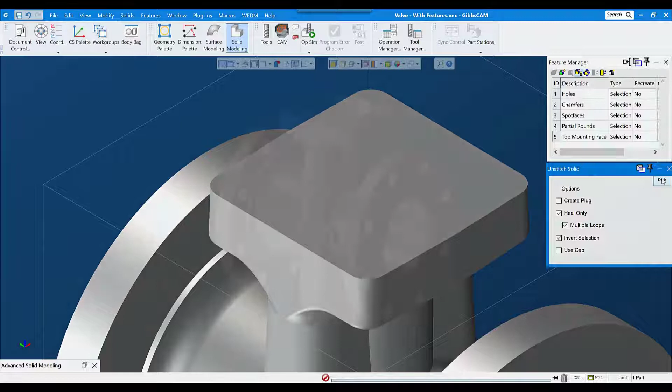This valve body is a fairly straightforward part to program, but we'd probably want a casting model, both for accurate material removal calculations and to make the simulation more realistic. So I will start by placing the model in the body bag by double clicking it. While it's still selected in the body bag, I'll go to the Modify menu and select Duplicate.

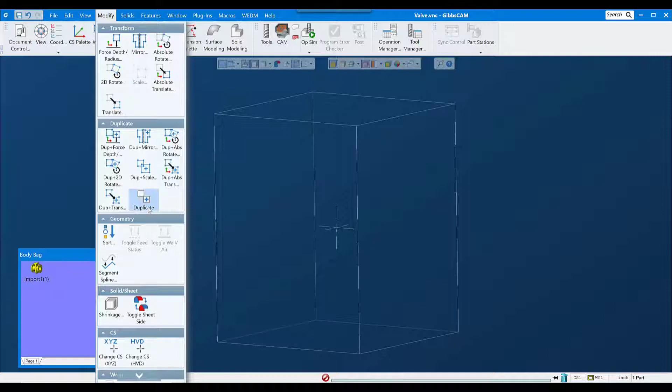The shortcut key for duplicate is Control D, and that gives me a copy of whatever was selected when I duplicated. I'll leave the original model in the body bag and leave it alone, don't want to change it, and I'll modify the copy. Now under Solid Modeling and Advanced Modeling, the fourth button over is Unstitch Solid.

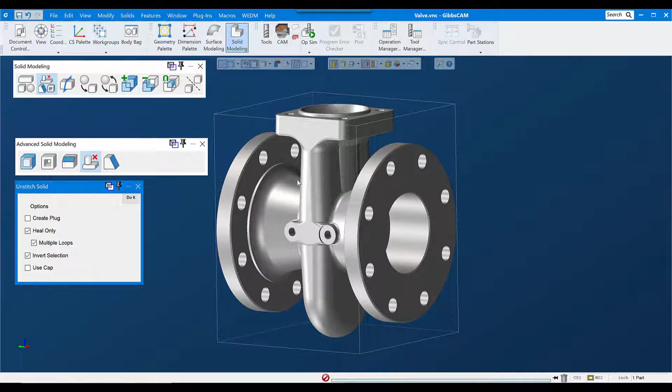Unstitch Solid allows me to remove features from a model. And there's two modes I can use, especially for holes. The first is Edge Selection. If I turn edges on, I can select the top and bottom edge, or really any edges in a single void that break out of the model, that break out into open air, and click Do It.

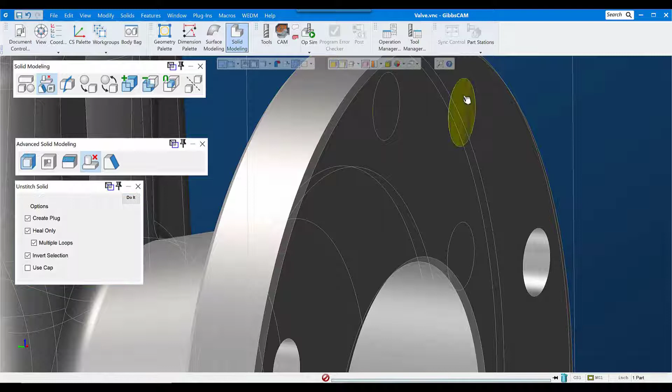Now notice that there is a Create Plug choice here. If I turn that on, there will be a negative of the space that's filled in created, as well as removing that space from the model. So here's a plug that represents the negative of that hole. Typically you would use this for core and cavity or some other situation where you need the negative of that void. Generally speaking, I'm going to leave that off for work like this.

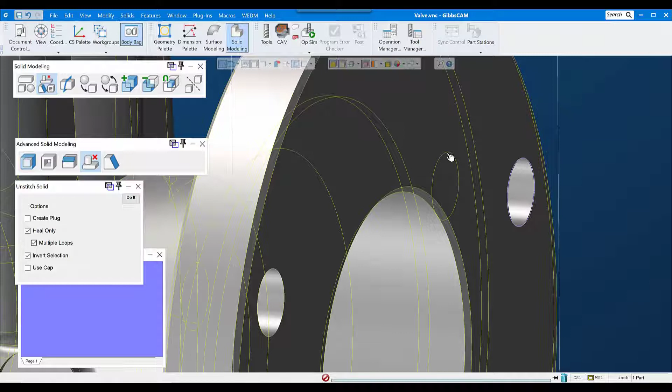The limitation to selecting edges for unstitching is that I can only do one void at a time. If I try to do multiple voids, I get a message saying edges split body into more than two face sets. So I'm limited to one edge set at a time.

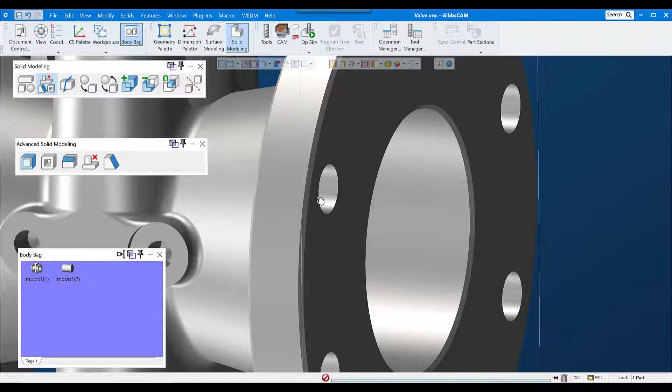Now the other mode that I can use is face selection. Face selection allows me to simply select all the faces that make up that hole, and on simple holes like these, this is probably the fastest, easiest way to do it. I get the same result as with edge selection, with the exception of I can select multiple holes or multiple voids at one time.

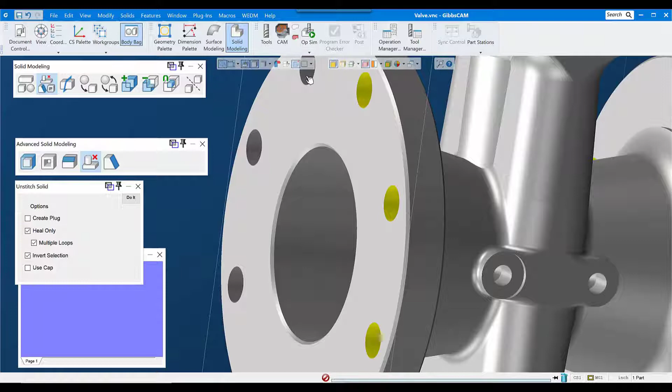But you need to remember that I have to select all of the faces that are part of that hole. So on simple holes like this, it's fairly easy and straightforward, but on more complex holes, it can be time consuming or difficult to get all those faces selected. We'll go ahead and remove these holes up here while we're at it.

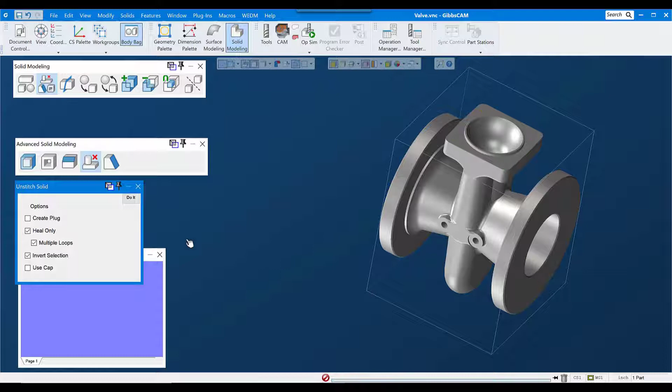Another use that I can put Unstitch Solid to is removing other features such as chamfers and fillets. As long as the software can merge the faces on either side of what you're unstitching, it will successfully unstitch.

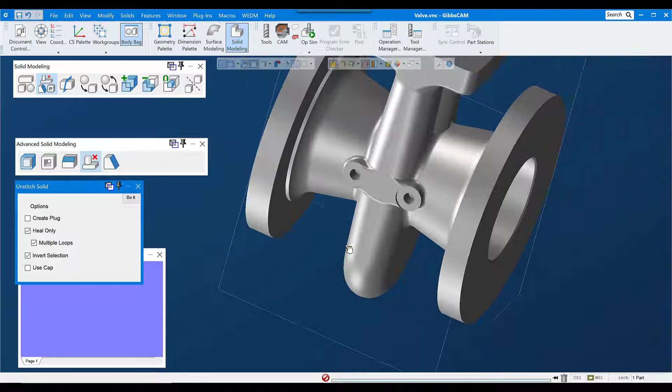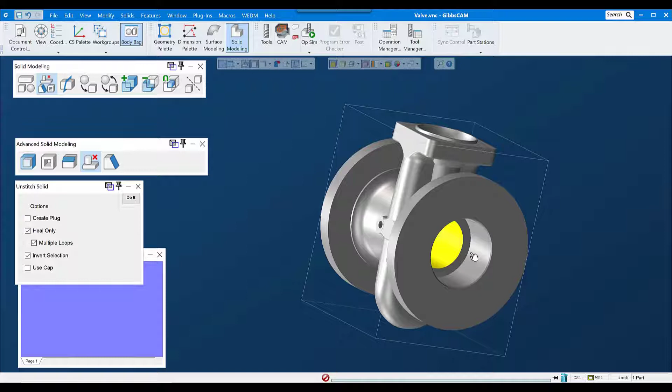Now, to remove this big cavity here, it's pretty easy to see that we have three places where that breaks out into open air, but in reality we have 5 because these holes also intersect that same void. So it would be a bit tedious and possibly difficult to reach all the faces that we need to reach to do face selection. So for this, I'm going to go back to edge selection and select the edges where this breaks out into open air.

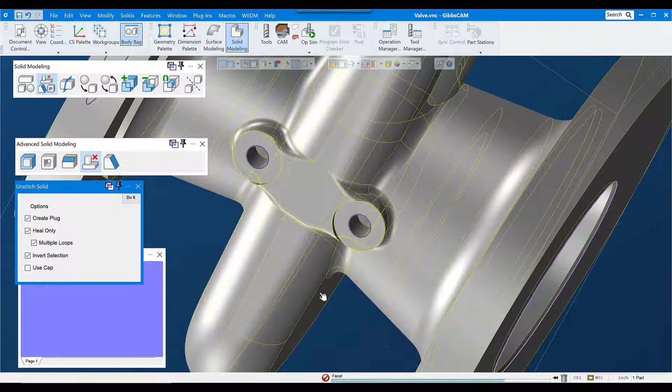So we'll get the 3 big ones, as well as these 2 smaller ones. And we'll unstitch that. Now in a situation like this, sometimes it's handy to turn on Create Plug, which can give us a negative of the space that was filled in, which sometimes is handy for making sure you understand exactly what's going on inside the part. In this case, it's really not necessary. I'll go ahead and delete it and bring our model back out.

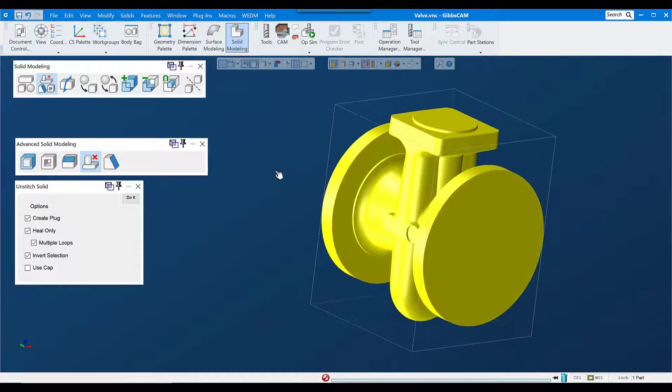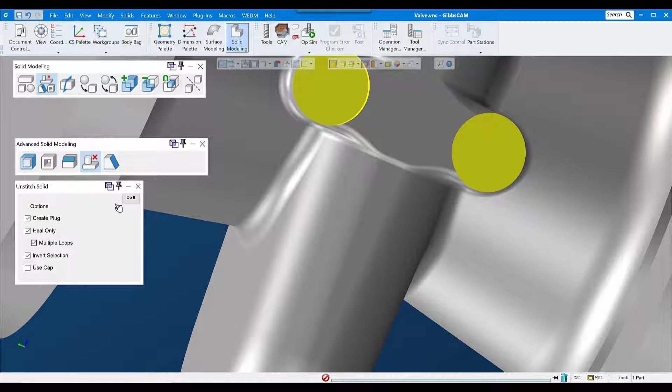Now, just one more thing, you're not limited to chamfers, fillets, and radiuses. You can also unstitch bosses and counterbores, spot faces. As long as the software can merge this face to the surrounding faces, it can successfully unstitch.

Right, I'm going to put this in the body bag, and I'm going to duplicate this part one more time. And I'll show you, I guess you could call it a trick, for selecting a lot of holes at one time. This is handy if you have a part that's got a lot of holes in it or more complex voids that need to be filled.

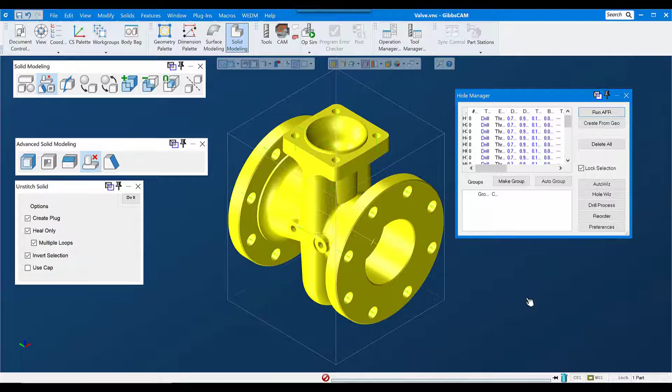And that is under features, using the hole manager and running automatic feature recognition to find all of the round voids in this part, which it has done, and I typically would auto group them, and I can go through and select a group at a time and unstitch those.

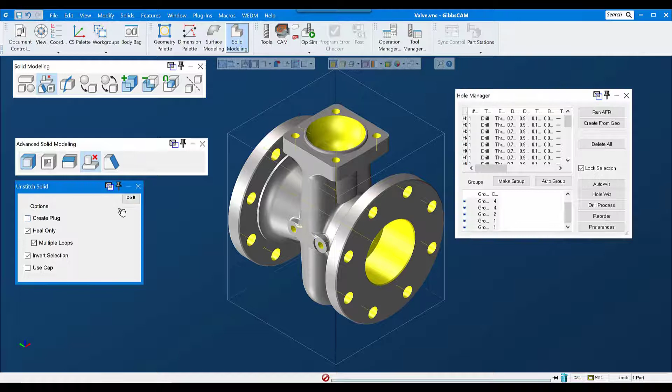Or if I know that I want to just remove all the voids from this, I can select the top through the last group, so select all of these groups, and while they are selected, I can just unstitch them all. I don't want to create a plug here. So that's a way to quickly select a large number of holes or voids at one time.

In this tech tip video, we examined using the Unstitch Solid command to defeature a model. We might want to do this to create a stock body representing a casting or forging, such as what we were showing here, or representing a part with some of the features already machined in prior setups, or possibly to create a process model to make it easier to achieve the toolpath that we're looking for.

For instance, a 3D face that's got some small holes in it that we want to remove just so we get a continuous toolpath without the software paying any attention at all to the holes.